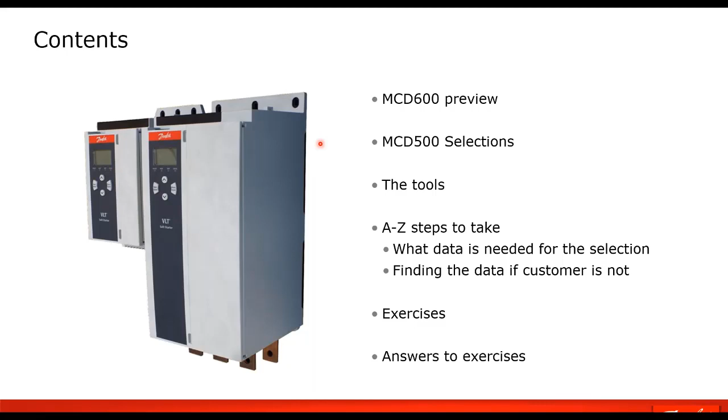The tools that we use, and also we're going to talk about some of the steps we take, using what data we have and some customer information, to picking the right soft starter. And then I have a few exercises, some examples of choosing it utilizing some of these tools, and then I'll go over some of the answers and some of the data that we found to help pick these particular sizes.

First off, this particular soft starter is the MCD 600. It's our newest soft starter in our series of 3-phase soft starters. It offers a lot of advanced features for motor control, protection, and fixed speed applications. I do want to mention that in our marketing of this, we call it the single speed drive. We have VLTs or VFD drives, which are variable speed, but soft starters are typically 1 speed.

And I do see there's a question there: what COM cards do they have? Profibus, Profinet, Ethernet IP. I can go over some of the other features and options that we have later on, but yes, we do have Ethernet IP, Profinet, and so forth. I do have a secondary presentation if we have time to go over different features. But in this one, we're going to start off with selecting or properly sizing one. Other features it has are smart features, application features, and fieldbus, both serial and Ethernet based.

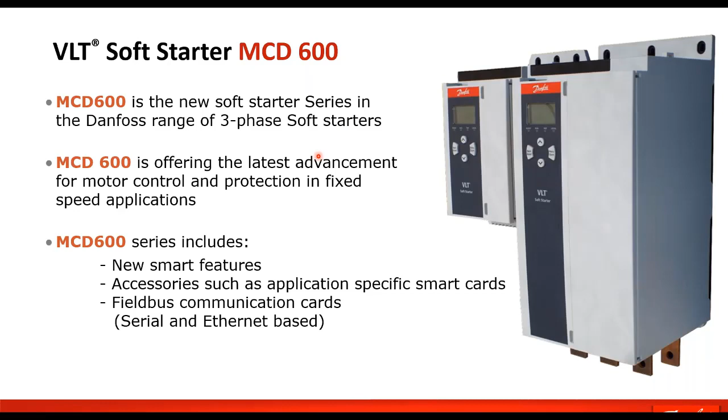In this particular series, we do have different current rating soft starters, and that is part of the type code. In most soft starters, you select them based on their current rating, and that current rating does vary based on the starting currents that we need. Part of the code is that this particular soft starter has internally bypassed contactors. This is a voltage limiting soft starter, and with voltage limiting comes current limiting. That's how we soft start a motor.

But once it's done going through the starting profile, we get to full speed and current drops off. It then has contactors for all three phases that close, so the motor is essentially connected to the line through the soft starter. The soft starter is still monitoring current for protection and other application features. This particular soft starter is considered a closed loop soft starter, as it is utilizing current feedback through internal current sensors to control the current that is being fed to the motor.

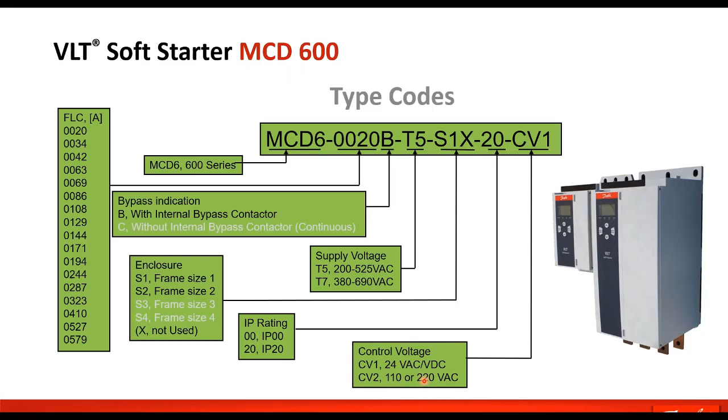Hey, Joey, a question came in. Yes. Does this soft starter have 6 thyristors? This soft starter is using thyristors or SCR controls. There are 3 modules, but yes, it's a total of 6. So there's a positive and negative for each phase, so full wave control. Some soft starters, which we do have a series, the MCD202, only have 4. The middle one's just a straight through bar. Not all 3 phases are controlled using the control loop, but this particular one is all 3 phases.

So basically, selecting your soft starter: the size of the soft starter must match the motor and the application. Select the soft starter that has the current rating at least equal to the motor's full load current rating. Now, some of that can move around based on different things. As you see, there is an IEC specification applied to starting, in this case the AC53b code, B for bypassed soft starters. There's an A for ones that are constant control. But this one being internally bypassed, you have the B code. Both of them have the current rating, how many amps the soft starter can handle. Then you also have the starting current, which is a multiple of the full load current.

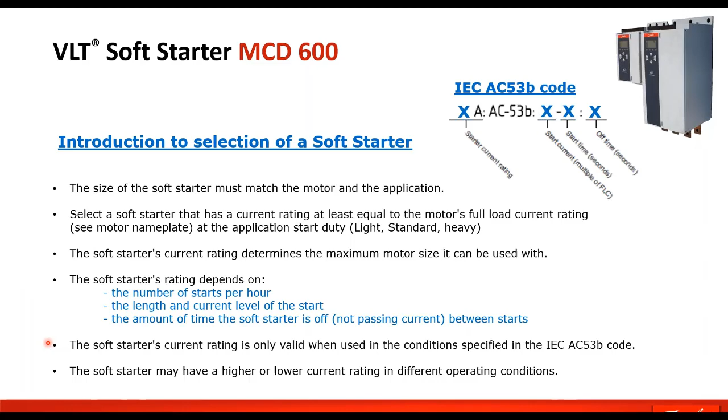Let's see, I kind of went through all this already. So moving on, some of the tools that we have for the soft starters: communication setups, setup tools, which is our Danfoss MCT 10 setup software. I will review that with you. WinStart. WinStart is a sizing program. Yes, go ahead. A question came in regarding that. What are the communications options? Do we offer Profibus, Profinet, EtherNet/IP? What are the options? Okay, let me just skip over to that here.

Let's see. I lost my control panel stuff because I was clicking on something. Give me 1 second. View. There we go. There we go. Can you see this one of the feature set?

Yes. Okay. So over here, as optional features, the serial communications show that we do have DeviceNet, Modbus RTU, and Profibus through these serial comms, and then over Ethernet communication, we have EtherNet/IP, Profinet, and Modbus TCP option cards.

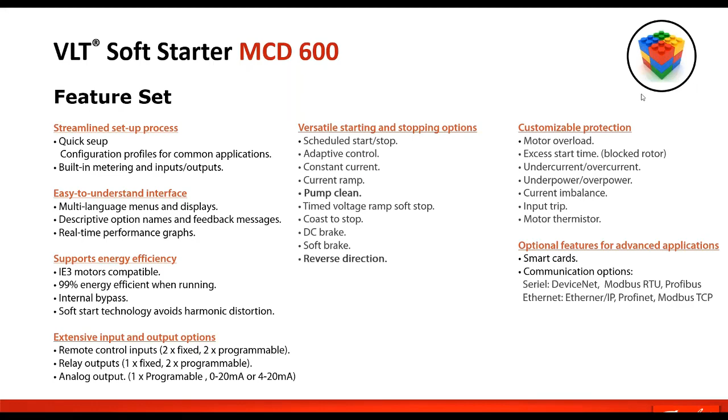All right. Great. And a question came in, how does it accomplish the reverse direction? It is another firing sequence, because yes, we are connected to the input. Of course, it has a clockwise rotation, but that's why I call it a kind of jogging. So it fires the SCRs in a manner that is mimicking a firing order that the motor is seeing, that it is making the motor run backwards.

I don't know if I'm explaining that well, but that's kind of my take on it, that I've seen it, how it fires it out of order in a way when the peak of the wave's coming by, to make the motor start jogging backwards.

Okay. Are you seeing the screen now that says the tools? Well, I guess I can actually see my audience view. Yes. Okay, I can see where I'm at. All right. Any other questions before I move on? Okay.

So MCT10 is our setup tool that we use for setting up drives, but we can also use it to set up soft starters. In the case of the MCD 600, we have implemented that back in version 4.40, and I believe we're at 5.10 now. But at any version previously, if you already have MCT10, you have that function already.

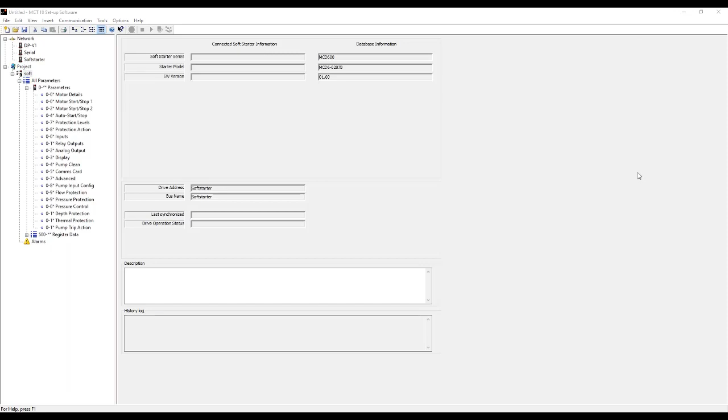Let me change back. Where was I? Oh, not on the presenting.

There we go. So through a USB thumbstick. Okay. So again, once you have all your parameters set, you can right-click on the project or on the MCD, and you can export it to a parameter file that can be loaded on the USB stick. Same way in the soft starter, you can pull the parameters and import it into MCT10.

Go back here. The tool is free. The MCT10 setup software is free to download on our Danfoss Drives website.

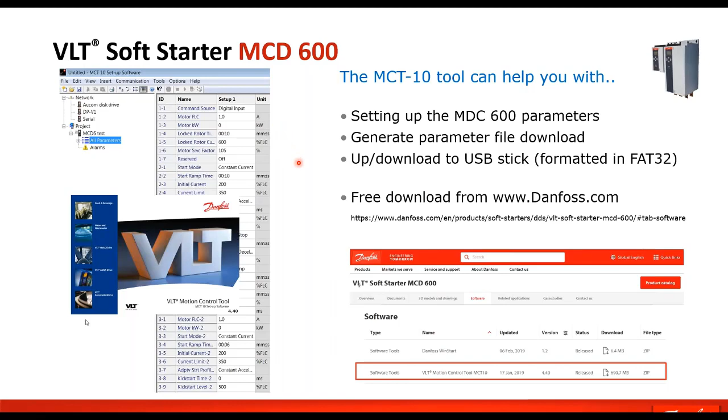Another tool that I've mentioned is the WinStart program. There are two available out there. There's a WinStart for our older generation of soft starters, the MCD 200 and 500, and then there's one now for the MCD 600 and more updated version. It has a couple of different functionalities built into it. You can use it to find the max full load current of a particular soft starter if you have one. You could also use it to select a model

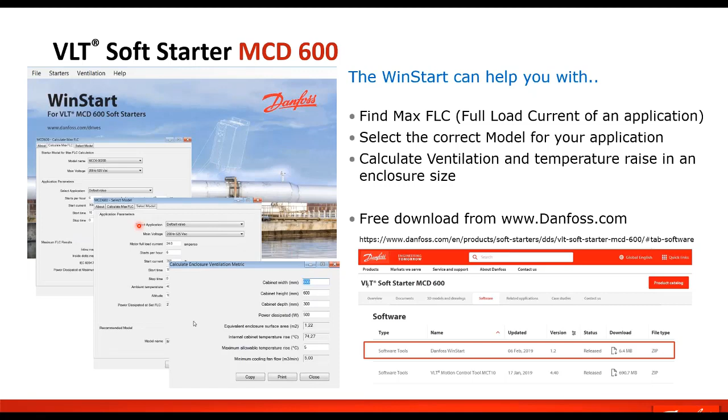for a certain application. One thing we were mentioning earlier is how much starting current do I need for the application. In the program, you can load it if you know already, but there is a selectable application and it will auto-fill typical things. It will tell you what the starting current is and fill in some times, but you can modify these settings and it will change which soft starter is proper for that particular application. This is again a free download on our Danfoss Drives website.

Utilizing this tool, in finding the full load current, you pick a model and the voltage. You can pick an application and it will fill this in, or you can enter it in and it will give you the ratings as we're talking about down here. It will also give you the dissipated watts at full load current for sizing panels that you're putting it in. There is also a panel sizing or airflow function built into this new version of WinStart.

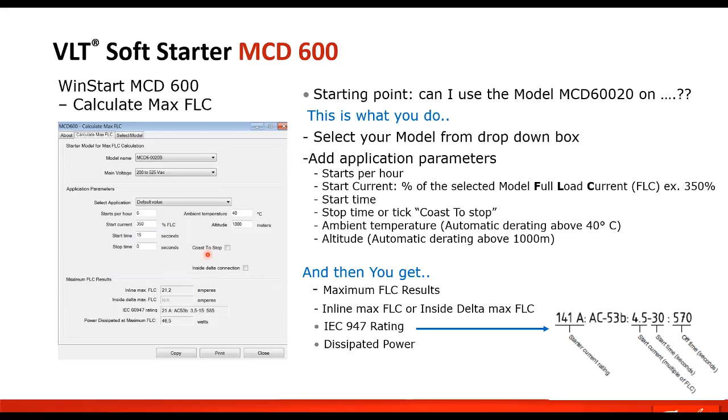So in this one, as it shows, like selecting the model, again, you can select an application, the voltage rating, and you can select the motor rated current in here. It will fill in these, but you can change the starts per hour. It will auto fill in the starting current, but you can change that if need be, the starting time necessary, stopping time, or if you're coasting to stop, the ambient temperature, and the altitude. And it will give you the power dissipated here and the model number at the bottom. You can also select an inside delta connection.

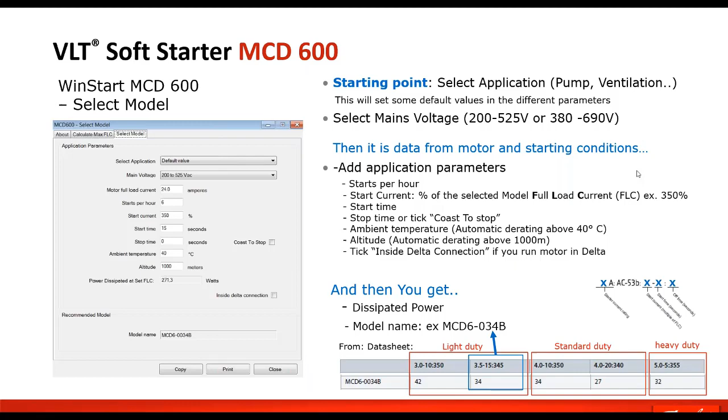One of the questions I get is, what is an inside delta connection? Some people know, some people don't. I was looking a little bit for what is an inside delta connection, and I did find a pretty good explanation here from one website. Our friend Google can find all, but an inside delta connection is a 6-wire motor. Generally, it's got the 3-phase windings, and they are individual. You can get to both sides of them. Typically designed for use with star delta starters. If this is the type of motor, you can use a soft starter with it instead.

The importance of selecting that is, because it's only handling kind of half the current going through, you can get away with a smaller soft starter. That's why that is a selection for picking the soft starter. If it's a star delta, you can basically almost half it in a way. Here's kind of a look at how a star delta connection is: as you have the 3 connections, it will connect it in a star for starting and then change over to delta for run. When you're connecting a soft starter, we are in the delta mode, and then just limiting current for the starting.

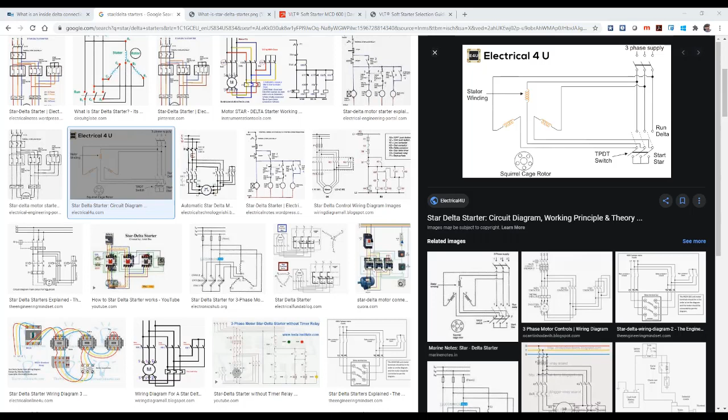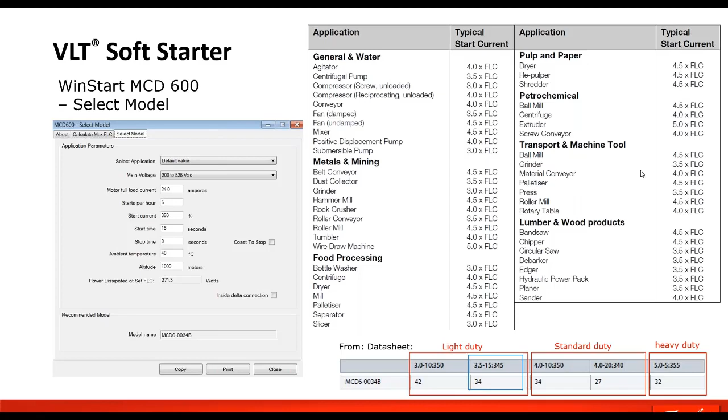It does give general different applications and what is the typical starting current for each application. Picking it in WinStart will do the same thing and fill in these typical numbers. There are also some guides that we have available. Let me find one here. There's one that I did share. One of the guides I want to bring up has an easy table based on horsepowers, where you have your full load current ratings and then which soft starter it is.

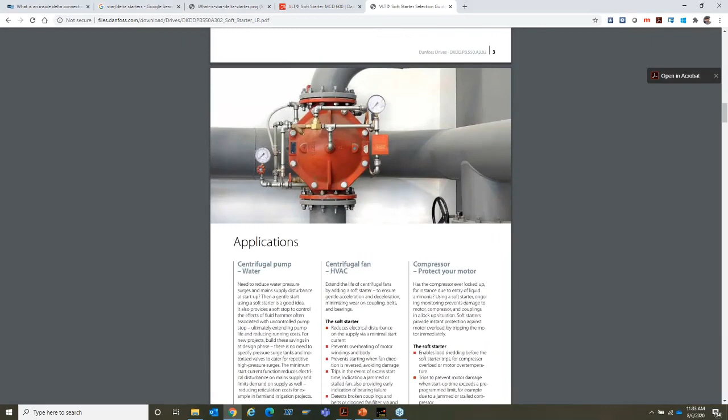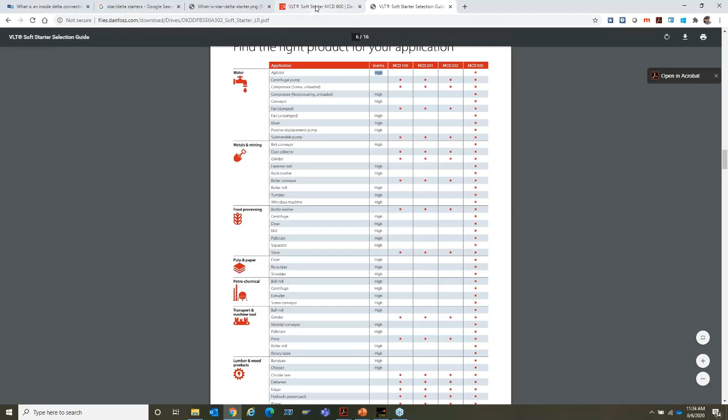Again, we get to the different duties, and this is where some of the selection guides that we have out there will have kind of the same situation based on different types of applications. This one goes by inertia, which I would say is more the weight; the more current it needs to start. So this would be a heavy duty, and the ones not listed would be a standard one. That, in combination with a table, whether it's standard duty or heavy duty, tells you which soft starter to pick. But again, we always pick them in relation to their current ratings, but current and horsepower kind of go hand in hand.

Another function in the WinStart software is the ventilation enclosure cooling calculator. You can calculate based on metric units or imperial units, inches or degrees Fahrenheit. In there, you put in your cabinet size, the power dissipated, which we found from the soft starter itself, and then it will give you the enclosure surface and the internal rise. In this one, it shows 74.3, so this would be the temperature in degrees C in this particular case with no fans. But if we need it to not go higher than 5 degrees rise, then it tells you the minimum airflow that you need to ventilate the cabinet.

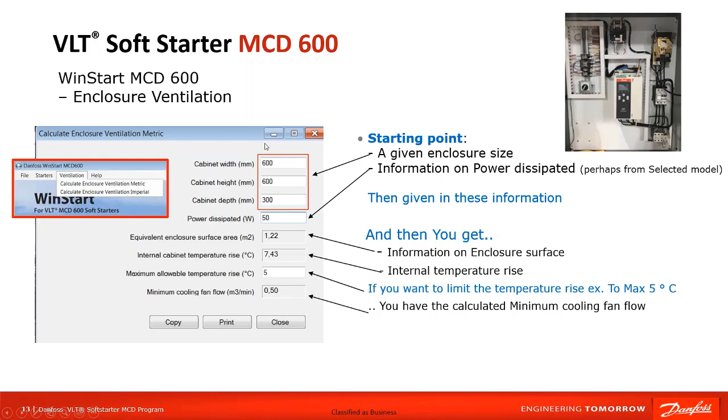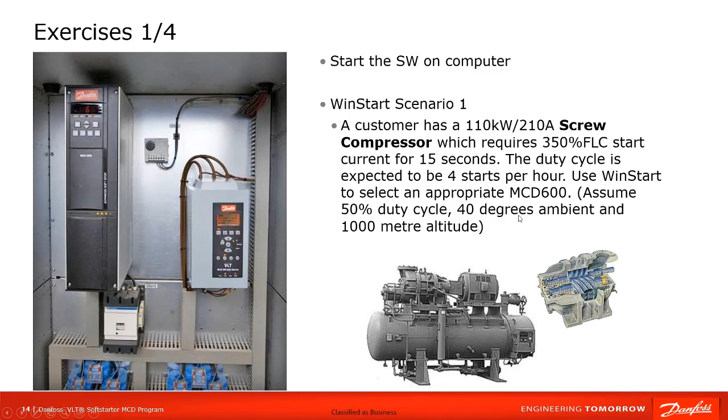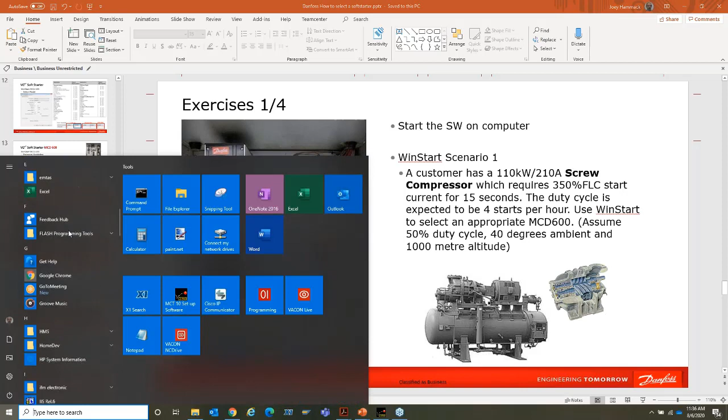I'm going to go ahead and demonstrate with the software some scenarios where we're going to size a soft starter. Let me exit that. I thought I already had it running, but I will start my WinStart, and I'll show choosing this with different tables and such. So in this scenario, we have a customer with a 110 kilowatt screw compressor, or 210 amps. We know this already from the customer. It uses 350%, and we can also verify that in here. They want to start for 15 seconds, and the duty cycle is expected to be 4 starts per hour.

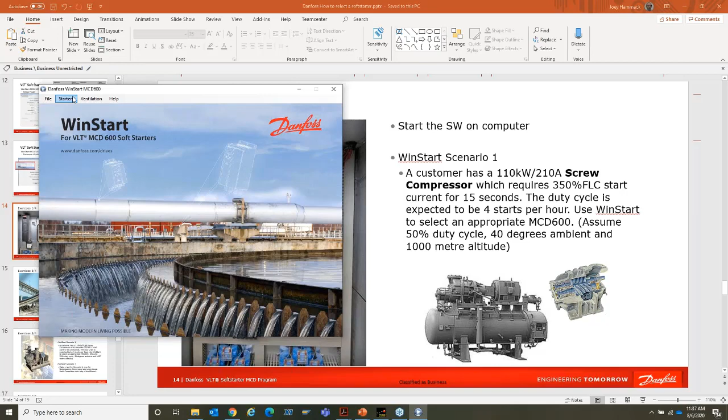So we go here to starters, pick our soft starter, and select model. Here, as I said, there are different applications. In this case, we're going to do a screw compressor, and there are two kinds: starting loaded and starting unloaded. Most of these will have an unloader to start running, so we're going to pick unloaded. You see it put the starting current here at 350%. If I do the heavier duty one, loaded, a little more current is needed to start. You can see starting current's 400% here. But I'm going to go unloaded.

Current rating of the motor, 210 amps. You see the number here is changing at the bottom. 4 starts. I do have to click to another field for this to update down here. And my start time is 15. It gives us our power dissipation in watts and our model. So in this case, it needs a 244 amp rated soft starter.

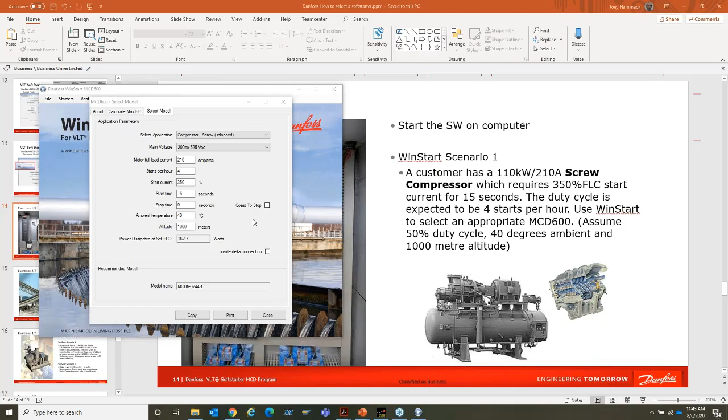What is the max delay in seconds? It's a good one. So in the parameters, I already have it up in MCT10. So my start time, oh, I have a screen in my way. There we go. 3 minutes.

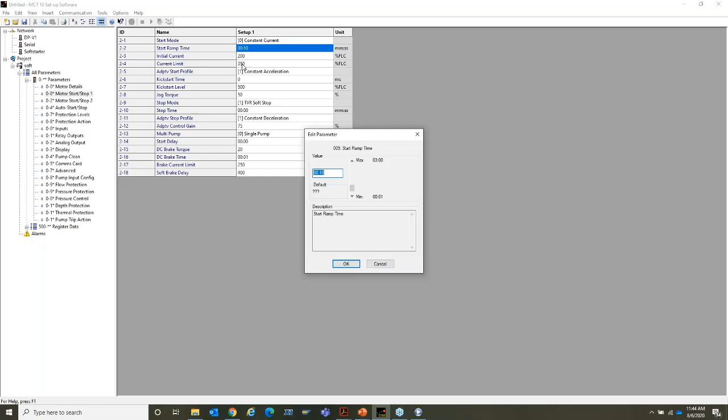Now this setting in the soft starter is more of a limiter or monitoring, because how long it takes a motor to start is going to be based on my initial current and my current limit, how many percent I'm setting it to. Basically, whatever I'm limiting the current to, the application will determine how long it takes that motor to get to full start. Of course, the higher I set this limit, the faster that motor's going to start. This will more monitor if it's starting to take too long to start from what I've set.

And as I was saying, the other protections built into it, we have selectable protection limits as far as current imbalance, undercurrent, overcurrent, under voltage, over voltage, under power, over power, excessive start time, restart delay, and starts per hour.

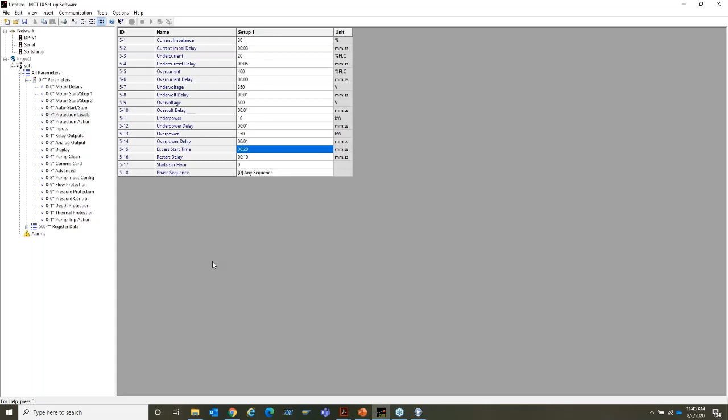That's a good one. How does it handle a thyristor short? The MCD 600 does have a unique feature in it, actually. If one of the thyristors shorts, it can alert you that one of them has failed, but it will go into a 2-pole control mode. It will actually close that contactor and you will still be able to start through 2, but it will give you time to do a replacement while the soft starter has been damaged.

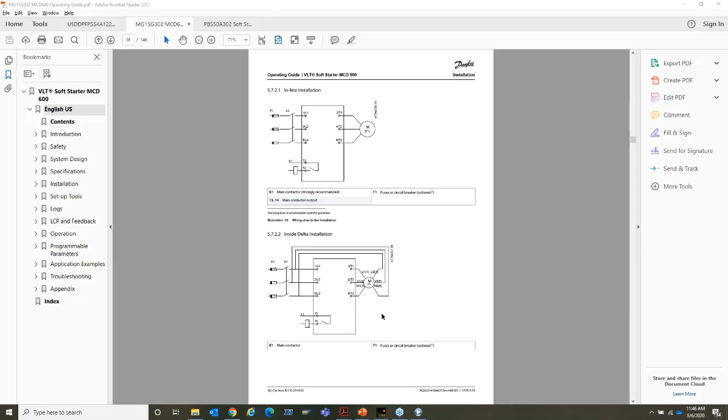Now, that's a good point, as I showed with the inside delta. We do suggest for soft starters to have an isolation contactor in front of it. The soft starter can control it for starting and stopping, to close it before the running sequence, and once it comes to a stop, it can open it. Reason being is because through SCRs and the filtering, even in stop mode, there will be leakage voltage seen on the output. For safety, it is suggested to have an isolation contactor in front of it so that there's no voltage shown on the output. All right.

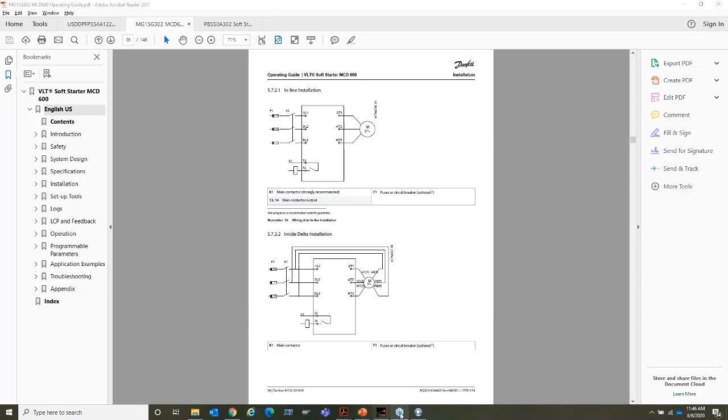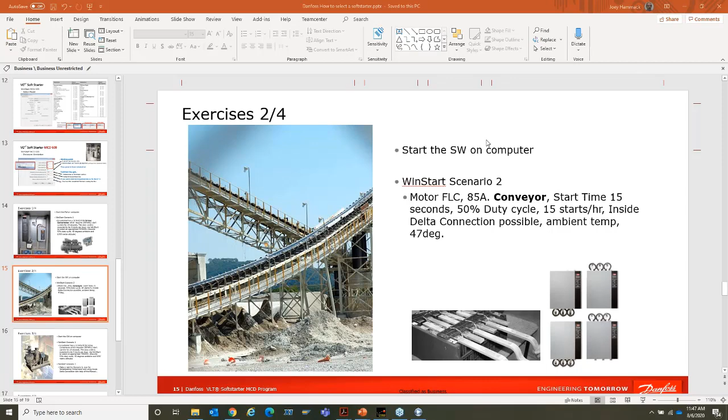Scenario number 2. We have a conveyor here, 85 amp conveyor. Start time is 15 seconds, 50% duty cycle, 15 starts per hour. This one has inside delta possible. And then ambient temperature is 47 degrees. So we will make a change here. We will do a conveyor. And looking at this, say it's a belt.

Okay, a little more heavy duty right away, 450% we see here. Current is 85 amps. Doing 15 starts per hour. And see the change here. At first it was 144 amp. Starting many times, it's going to warm it up. It needs to handle more temp, higher current. Changed it to 171 amp. Start time is 15 seconds. Brought it down again. We're not spending a lot of time heating up.

Remember, these are internally bypassed. It allows it to be a little smaller and cooler when it's in the bypass mode. We're not firing the SCRs all the time, only during starts and stops. I didn't remember to do the temp. Temp actually brought it up. It's a hotter environment. So now our pick is the 144 amp soft starter. Now we do have an inside delta connection possible.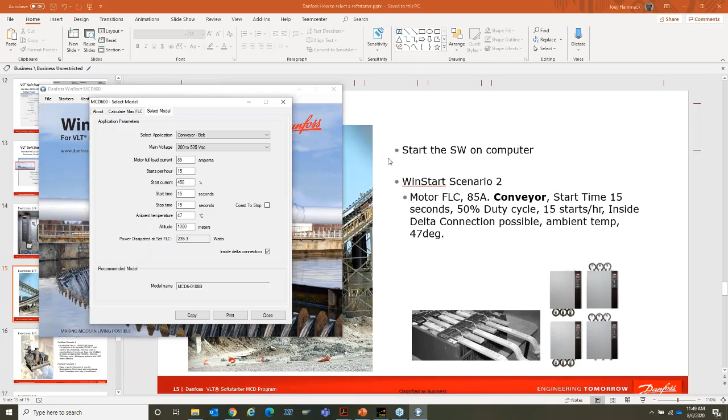I will say at the end of this presentation, I made a mistake in my calculations here because I forgot the temperature in this example, just so you know. Okay, it's down here. When I get to the end, I have what my answers were. And this was because I forgot the temp.

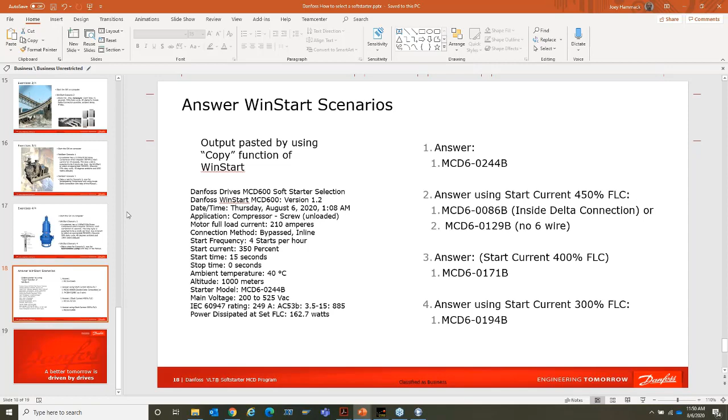Scenario 4, or 3. Kind of the same kind of motor as earlier, same as scenario 1, but now instead of a... what was the first one? A screw compressor. We're now using a reciprocating compressor, and we are using an inside delta connection. We can use the manual for help in this case. Now, a reciprocating compressor is big pistons, a lot of inertia, kind of squeezing air.

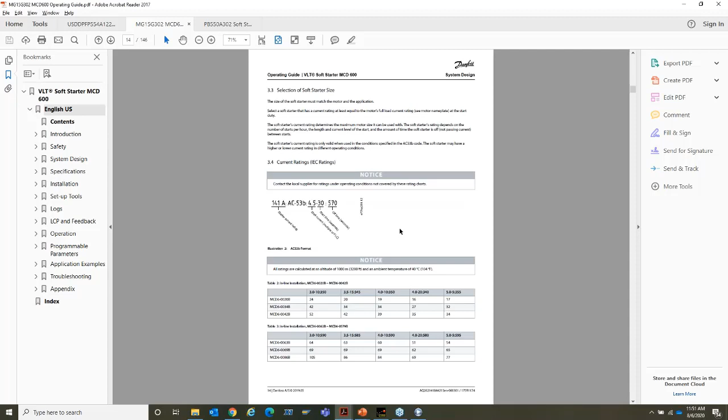If I was using the manual in this case, I just go to that and go, let's pick there. Now we know it's a heavy duty inside delta. So we do have a table for inline installation here, or inside delta. We know we're at the heavy duty range, and it was 210 amps. This one's a little too low, so I would go 235.

We're talking the time. I could probably go down a little bit here, so I can go a little bit smaller and utilize this soft starter. Now it depends on, see, I have 4 times current here, or if it's heavy duty, I think it might be more in here. So yeah, 171B. So these are the motor rated currents that I'm using based on these rating numbers. So I'm kind of going backwards, right? If I use this, we can see a difference here.

So we had before a screw compressor. I'll change the numbers back. What do we have? 4? 15 seconds. And we're just coasting to a stop in that case. I can even check mark that, it just zeroes it out. Remember we had the 171. Now I'm going to change it to reciprocating compressor, unloaded we'll say. Change it to 400% starting, and it upped the size to accommodate that.

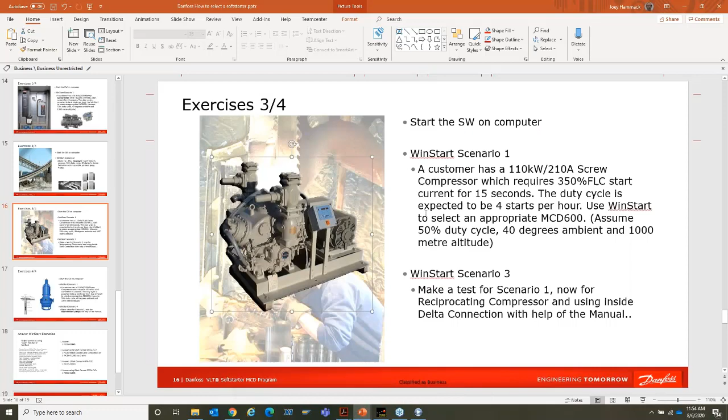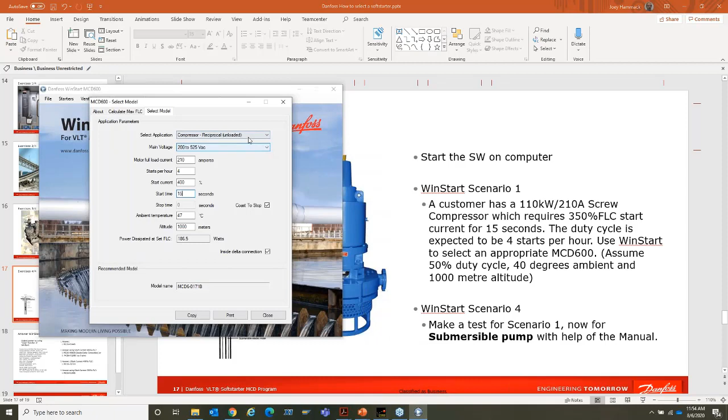All right. Third scenario. Fourth scenario. Same kind of motor as before again. This time we're going to use a submersible pump. So let's see. What is a submersible pump starting current? Would that be heavy duty or light duty? I can kind of look at a selection guide, take a look if I have those tables in here.

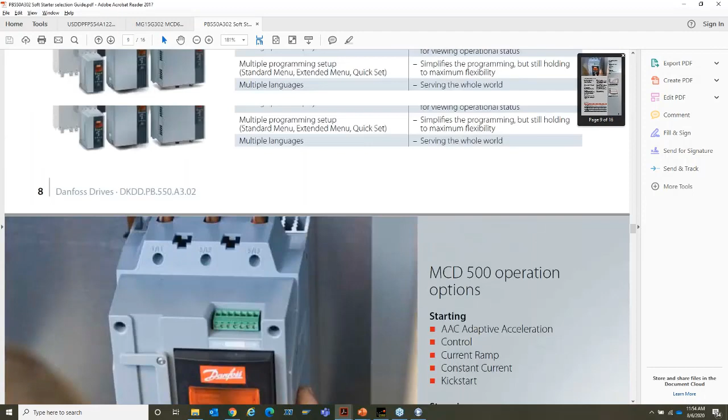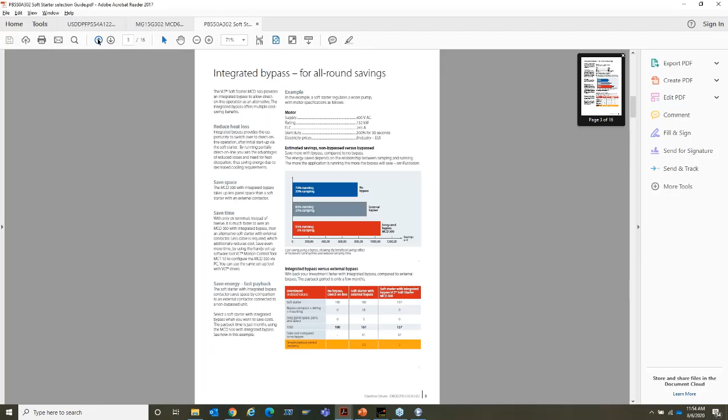Hello. Not that one. Not that one. It was this one, I think. Let's make this smaller. Yeah, this is. There we go. What do we got? A submersible pump. It seems to be a normal duty. I can put it in here. Being we're using this anyway, let's go down to pump.

And I got different ones in here. I got a submersible, centrifugal, positive displacement, or a slurry pump. Let's do a submersible. Popped it at 300%. It's a pretty light duty start in this one. They also made it smaller here. We're not doing an inside delta connection in that one. Brought it up in amps. 210 amps, still can use the 194 amp soft starter. Do we need more starting time? Numbers change.

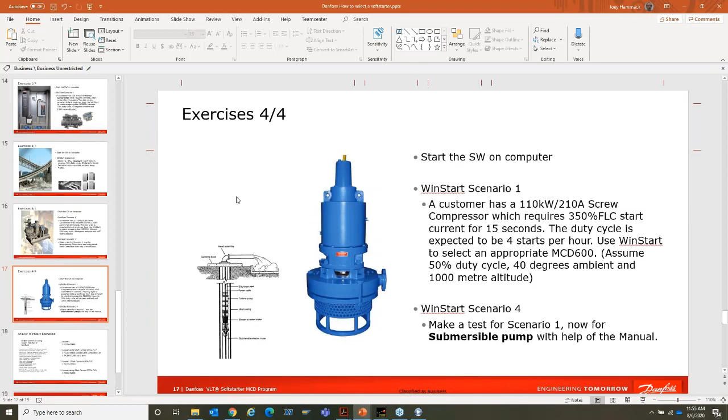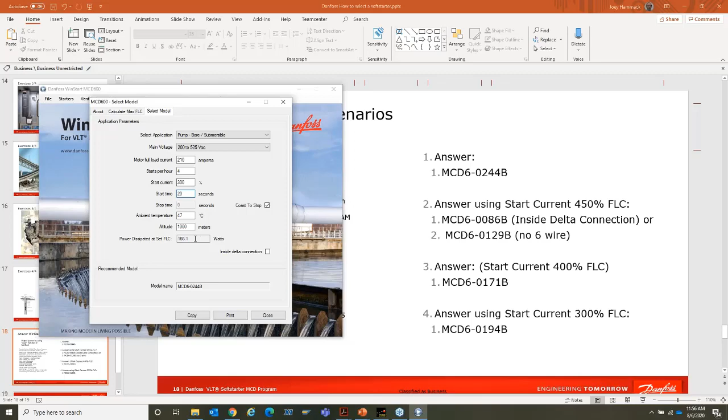So the software does make it easy to help pick different soft starters based on different starting current, different applications and such. If you are also picking that, you can copy or print this out, and it will print out, same as here. This is actually a copy from it and pasted right in here as I'm getting ready for this at 1 o'clock in the morning. But I did the screw compressor, the first one, and it added a little more, including printing out this IEC rating.

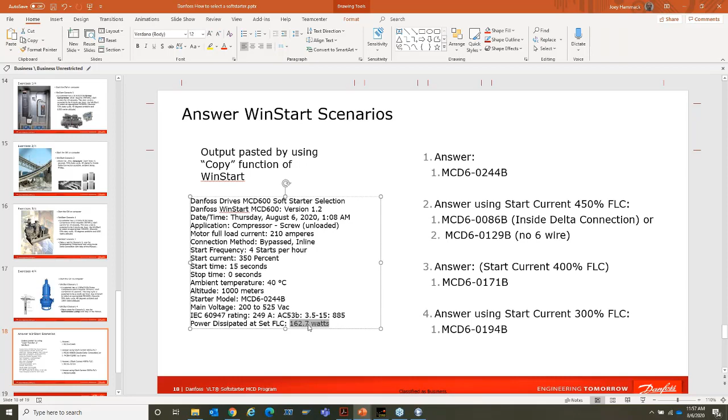So even though the basic current as we printed on the label is 244 amp, that's based on some other standard starting, but it can handle 249. So it's a little bit higher rated based on the starting conditions and the power, and it also gives you the watts that it's going to dissipate. And that's all I have for you today as far as selecting and sizing of a soft starter.

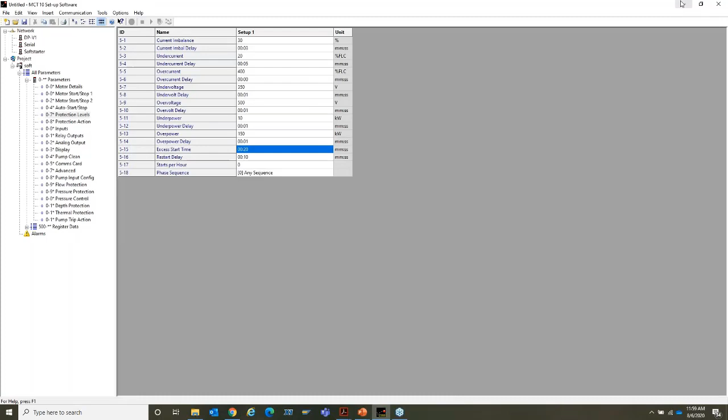I put answered by several ones you've already covered. I'm having trouble getting this to show up now. Right. You can drag it to a different part. Oh, okay. I drag it out of the column so it's easier to read and make it bigger. I had it in the main screen, and I closed it, and I think I lost the connection to it. Can you read it to me? Sure. Show your fields, all your fields. Alt tab. Show them all. It's probably hidden behind it. Let's close some windows here. No, I messed up somehow.

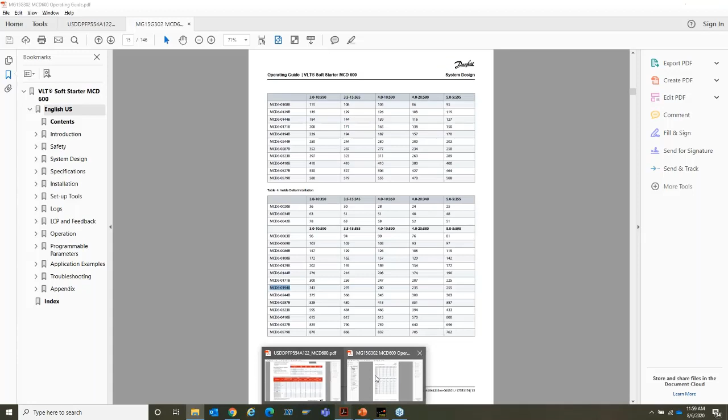So, is there a way to get the MCD 600 with line connections on the top? This is easier for a retrofit application. Let me see here. And I think they're all on the bottom. Some of the drives we have like a side mount kit you can do. Yeah. There used to be the other one, which I know the 500 has the ability to move them. I think the smaller ones, they're all on the bottom, or they went through top to bottom.

I think not in this one because the smart card and the digital inputs are on the top. So they're trying to keep with the safety ratings. You can't mix the low voltage and high voltage connections, they've got to be separated. But it's also the way the card is. All the options now slide into the top, and that takes up the room, unfortunately. I think when we get to the bigger ones, because the control will be more on the side, it'll be more like the older ones with bigger bars and they'll be movable from top to bottom. But these smaller ones with the internal bypass, it's all on the bottom and they're pretty small actually.

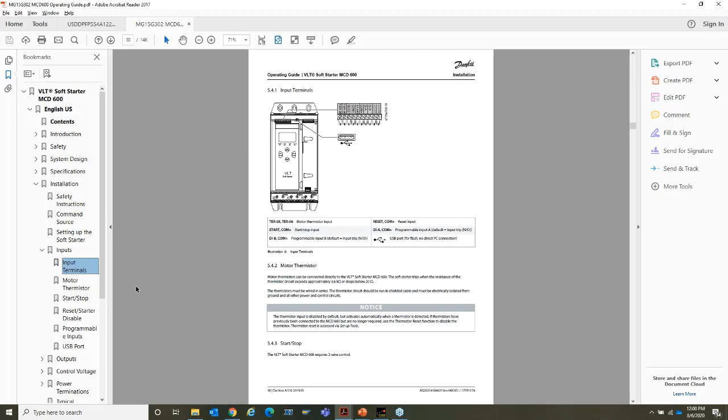I'm not sure you answered this or not, but how do we handle the thyristor shorting? An isolation contactor? Yeah, this was the one I mentioned that the 600 has this ability: if one of the SCRs fails, it will basically close the bypass contactor internal to it, and it will do kind of like the MCD 200 where we have two controlled phases. So it will still stop the motor and soft start it, as well as alert you that there's damage to the soft starter, but it won't stop your application from functioning. And you can schedule replacement.

Excellent. The last question, and I guess I wasn't paying attention. Somebody thought you had mentioned medium voltage soft starters. No, I didn't mention that. All low. Yeah, I don't think we do the medium voltage soft starter at this time. At this time. Okay.

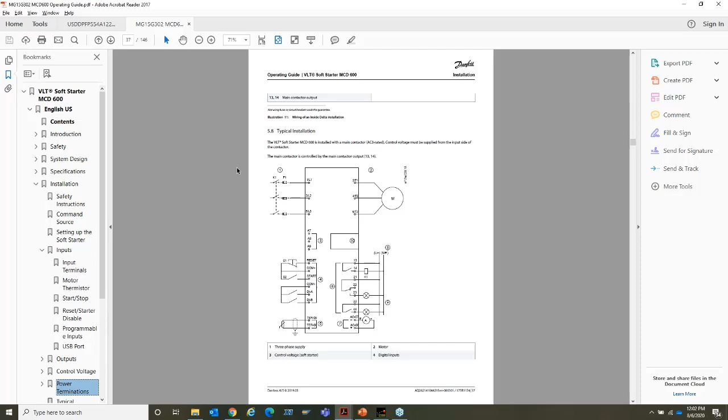There's a lot of different ways to size these soft starts and you get different answers. We've literally doubled the amperage. I tried to show all the ones. I know most of this, and I had a complaint that this table oversizes them. But this is using the NEMA, which is more in the US, and also doing the horsepower. And in some cases, bigger is better. I hate to have one in the field that's undersized and then it doesn't work. It becomes more of a headache.

That's why I caution a little when there's a split just by a size. Some of these are physically the same size anyway. I know there's a cost difference in some of it, but if there's any questions, please feel free to give us a call and we can look over all of the conditions and pick the right one, especially if we're talking a difference of $1,000 or something. But if the budget is there and it's on the hair, because things do change over time, sizing some things right to the limit can hurt you later sometimes.

But the software does take that into consideration. That's where it sizes it properly. So that's where I do like the software. It does pick it right, and you can play with some of the numbers and make a somewhat educated decision.